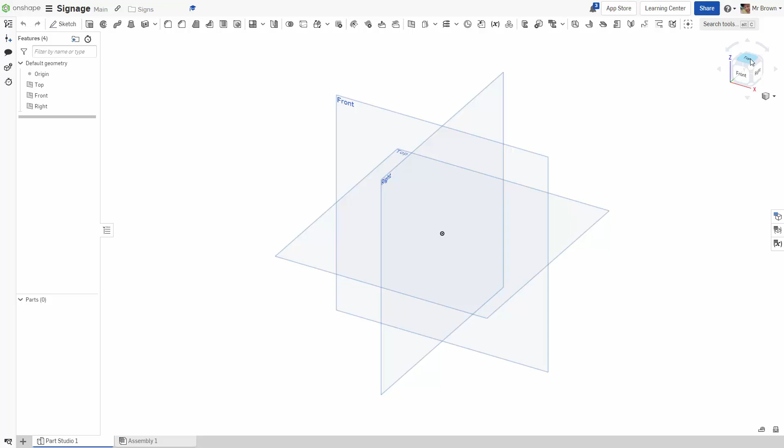and open up a new document. Now I'm going to go through this, how I'm going to make my sign. And there's a few things that you need to watch out for.

So I'm going to put my sign on the top plane. Actually, no, I'll put it on the front just to show you something later. I'm going to go sketch on the front, grab a center point rectangle and draw it out.

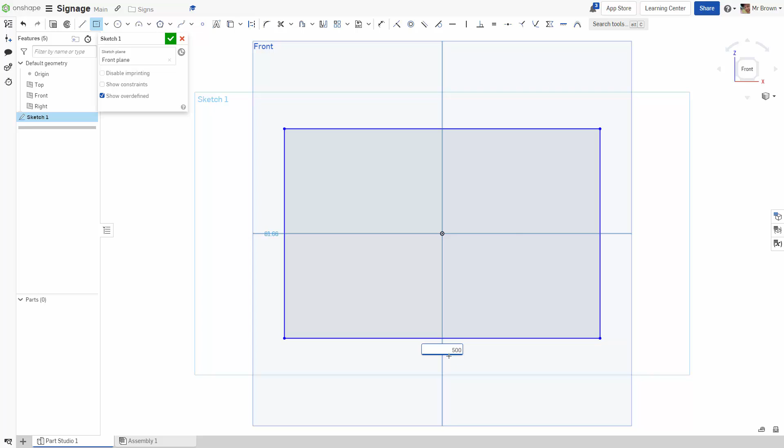Now ours is going to be 500, no bigger than 500 by 250. Alright, so there's our sign.

I'm going to put a couple of construction lines in just to make life a bit easier. So I'm going to go across the middle like that. I'm going to go corner to corner and another one corner to corner.

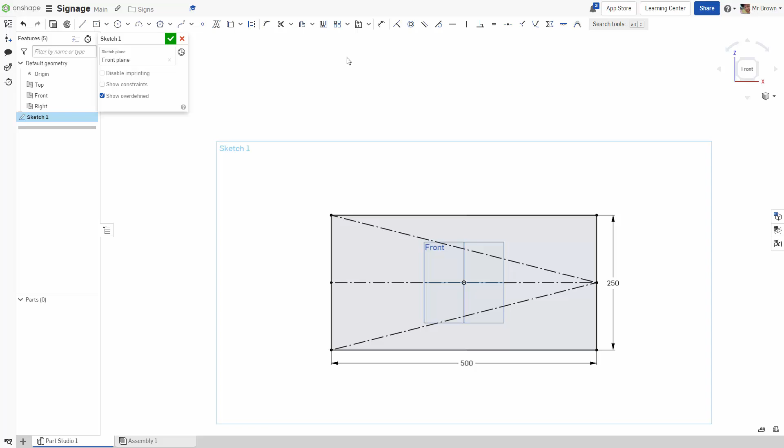I will also grab some points and put them on the center line. So see where that little square pops up? That's exactly where I want my points. Everything at this point should be black. It is fully constrained.

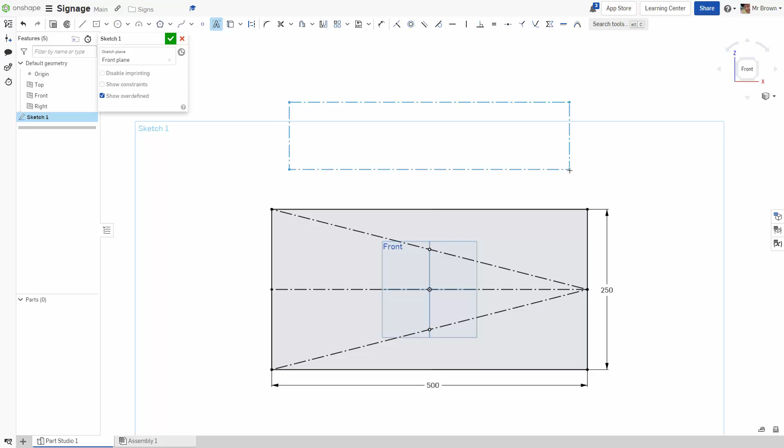Next step is to start putting some words in. So from experience, every word on your sign, just do it as a separate text box. You probably won't have that many signs, words, just because of the size of the cutter that we'll use. But we'll talk about that later.

My mum's name is Verena, and this is like a Mother's Day present for mum to put in the garden.

I don't think I will bold. You can bold if you like, but I don't think I will. I'm going to do another one, open this one here, and it's her garden.

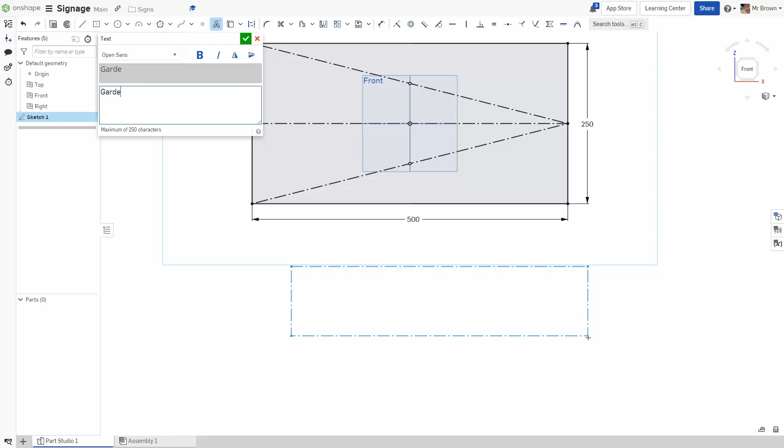Excellent. You can play around with fonts if you really like, but the CNC machine has to be able to cut it out, so the cutter, the thing that cuts it out, has to be smaller than all of these gaps, otherwise it won't work.

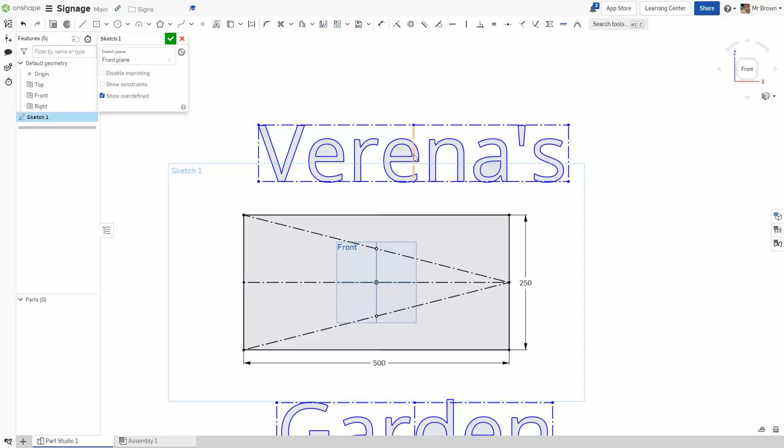Okay, so we've got our line here. We need to put these in here. So we're going to go to, what are we going to do? Midpoint. We're going to pick this center line and we're going to put it on our line.

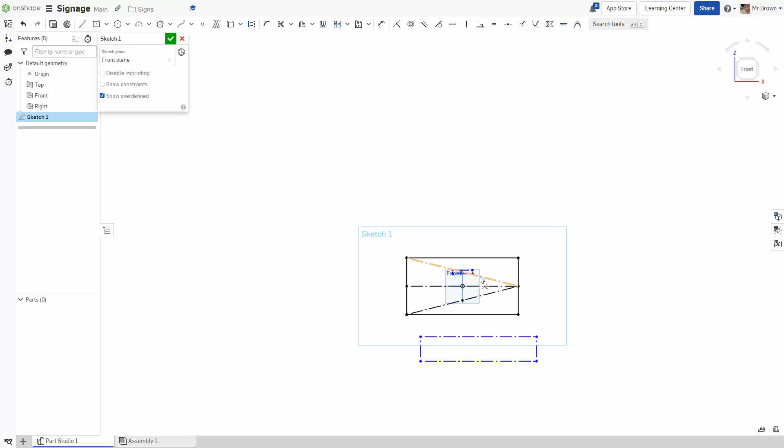Whoa, that's huge. Let's scale it down a little bit, but it's still all around that center point, which is good. I'll fix that later, and we're going to do the same here. So midpoint, this point, that line. That's how midpoint works. This point, that line.

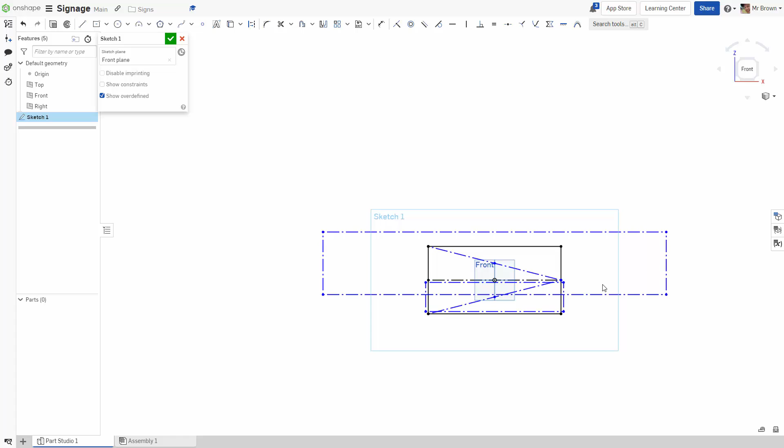Alright, what happens with this name? Alright, fine. Want to play hardball? We know our sign is 500, so we're going to drag this up and we'll make it smaller than 500, 480. We'll make it big, but not too big.

And garden, I actually want the garden a little bit smaller, just for the aesthetic. It's not as important as the name, so we might go 450. I think that looks nice.

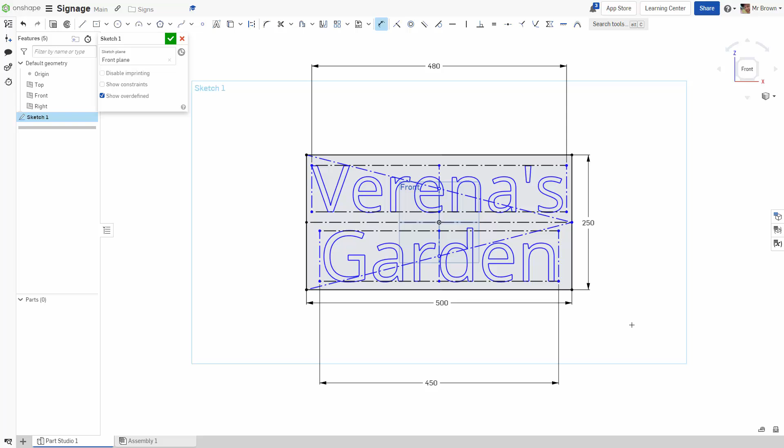Okay, if you're following with me, just for an example, you can turn my planes off. You can put your name in there and something else, but this amount of letters is probably going to work well for what we're doing.

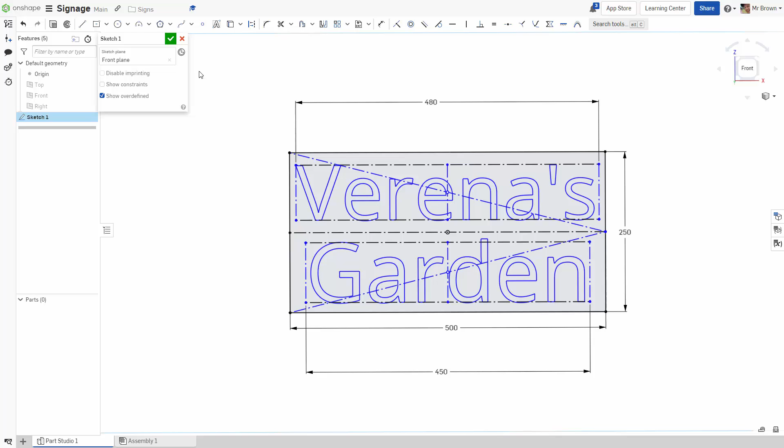Okay, so we've got extrude. We're going to extrude all of this out.

That looks pretty good to me. So click the background and get rid of the letters. I'm not going to leave these little bits in. I don't think it's needed, so I'm going to leave them out.

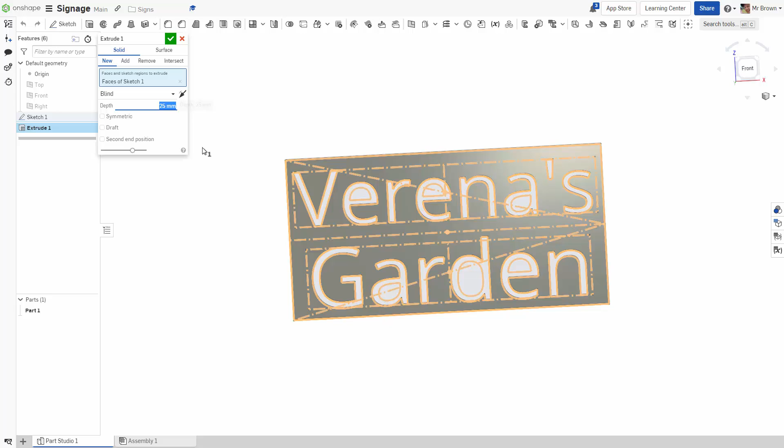The thickness of our piece is 13, but we're going to split it up in two. So we're going to do 13 divided by 2, and we're going to have this bit above.

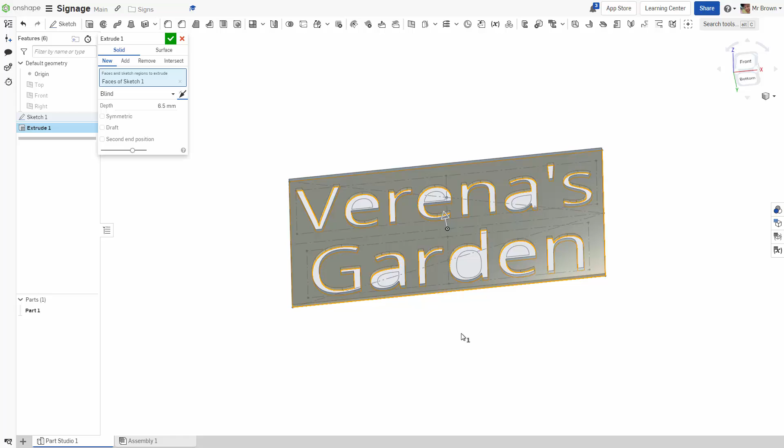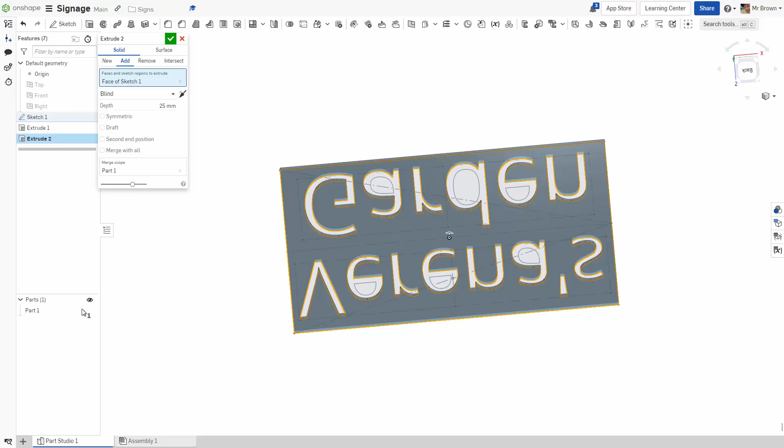So you can see the origin points there. We're going to push this one up so the arrow is pointing up, and click that. Fantastic. We need to turn our sketch back on, and we're going to click this again, but we might hide this part and just select everything. Then what happens if we turn it back on?

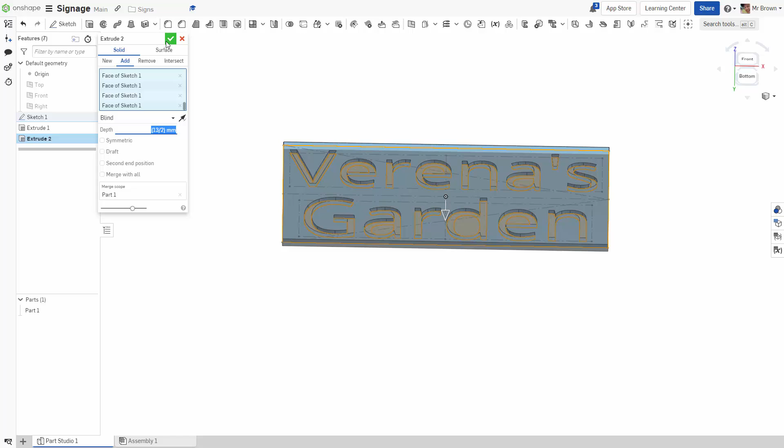Alright, so we're going to go down instead of up. Remember, it's 13 divided by 2, or you can do the maths yourself, but I like the machine to do it. And we're going to add, so this is all the same piece. Then you can see I've got all my stuff there, you can see Verena's Garden, fantastic. It's looking like a good sign.

With this sign, there's a couple more things I want to do. I want to round off the edges because they're a bit sharp for mum.

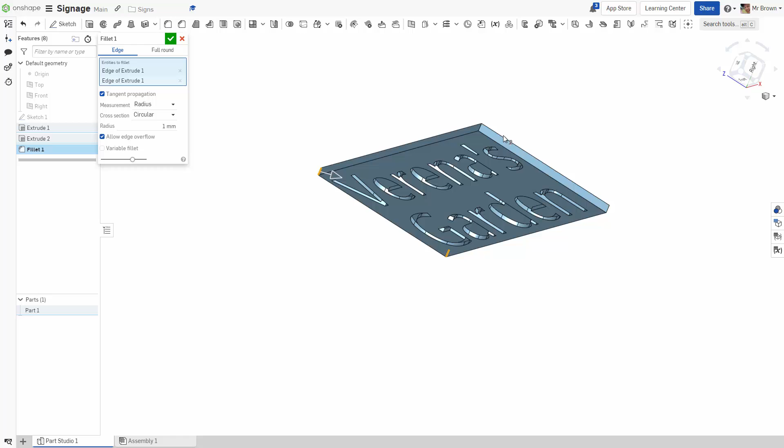I'm just going to click these lines, and this is a fillet, so it's basically just going to put whatever round I want. 1 mil is a bit small for this, 2 mil, I don't like a big round. You can go bigger if you like, but I don't want a big round.

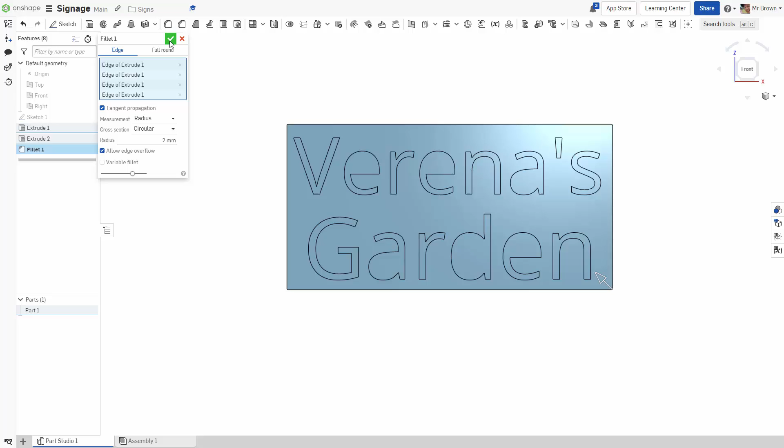All those other things are fine. Another thing that I want to do is just put some holes in it, just in case mum wants to tie a piece of string around a tree and hang the sign up.

So I'm going to put a sketch on the top and probably draw a construction line. I probably want my line about there. I'm going to put a couple of circles, maybe I'll just do one circle.

Now the size of your circle, we will make it - might be a bit big. 6.5. Oh no, actually I want to show you something later. We'll make it 6.35.

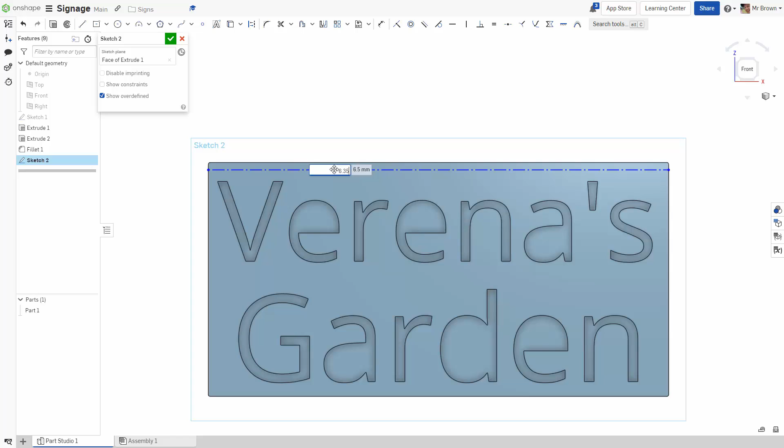And I want to not just put it anywhere, I want to put it sort of in a good space. So I'm actually doing this the wrong way here. What I want to do is draw a line down the middle - I want to work it from the middle.

So get rid of that. Dimension from the center of my circle to that line, and I want about 100. Okay, then I just want to mirror from my line - I want my circle on the other side. Escape mirror. Perfect, we're looking good.

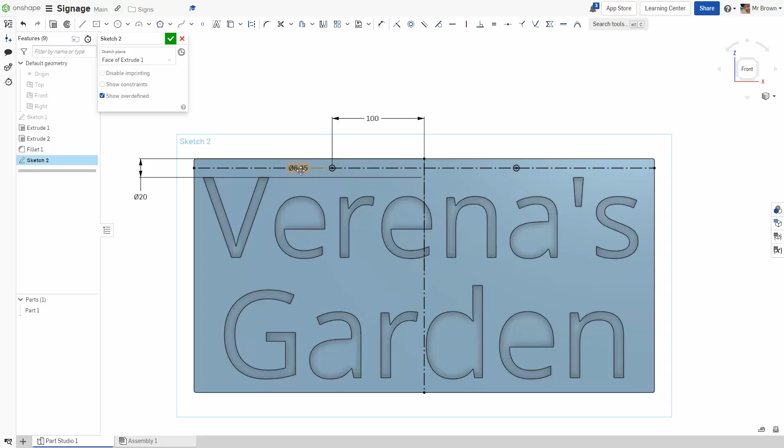The reason why it's still blue is because it doesn't know how big to be here. It's saying 15, let's just round it off at 20. So now it's all like that, perfect. Alright, there's two ways you can put a hole in.

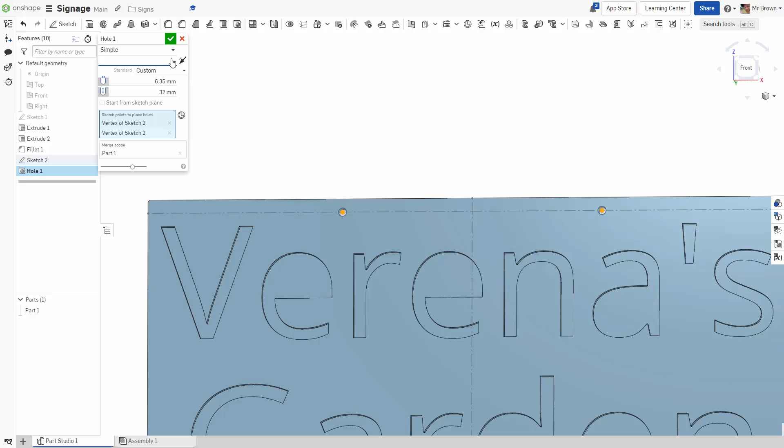You can extrude. We don't often use the hole function, so we might use it here. Click hole, click your dot, click your other dot. This is the size, 6.35. The depth is just through, and you'll see that we've got our hole all the way through.

Perfect. Merge scope with part 1, so it's going to be in part 1. Simple, counterbore, countersink - we're just going to be simple today, I think. Click that. Alright, there's mum's sign.

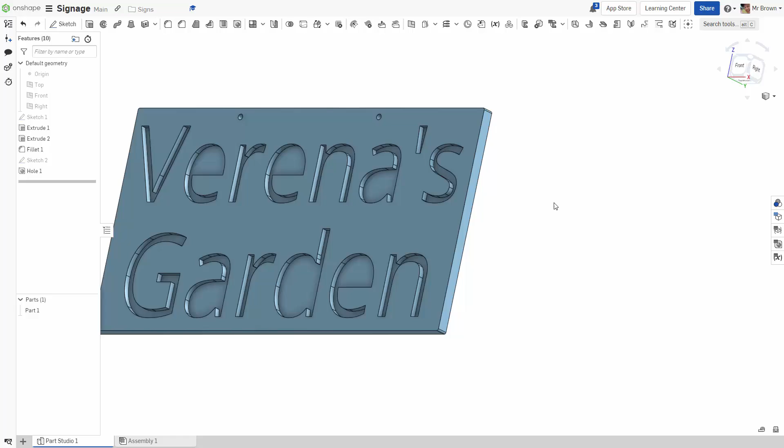Perfect, there's the back of mum's sign. Just a bit of a tip - if you ever want to flip around to the other side, you can click this little border around here and it'll just flip straight around. Okay, so there's mum's sign.

Now we need to get on to the CNC. That will happen in the next video.